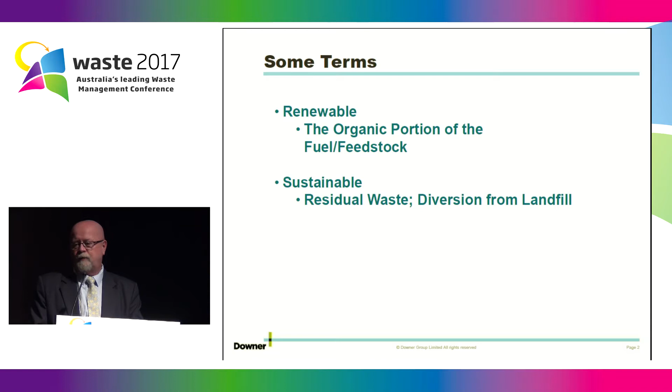So, the trick in looking at a waste-to-energy solution is to understand how much waste you can commit, and that goes back to a number of things. It's not just what my tonnage is in MSW, et cetera, but everybody will move forward and say, oh, well, we could handle all the excess tomatoes, I'm sorry, that would be tomatoes here, with this technology. And yes, if you had enough tomatoes, it would work fine.

The problem is you need to understand how much waste you have, and if you start divvying up every bit of the waste stream into a particular technology, you end up at a point where you have not enough waste stream to supply any technology. So understand what you can do, how much waste you have, and what your streams are.

And that sort of leads into what is the makeup of that waste, understanding the waste, the calorific value, MSW, are you turning it into RDF, are you just supplying MSW, etc., because that will dictate the technologies if we're talking thermal.

You also want to understand if you're looking at anaerobic digestion, for instance, or MBTs, et cetera, how clean the waste stream is, because a lot of people are looking at FOGO as another bin, for instance, and you would think naturally that anaerobic digestion is the way to go, but how clean is that stream? Is there contamination? Will the wheels fall off the technology you pick if you decide to go down that path?

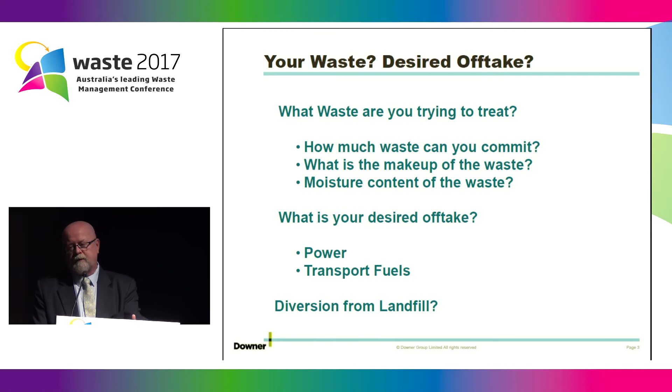And I guess the other thing is, how important is diversion from landfill? We talk about the organic side and the carbon footprint, but if you're looking at the non-organics, that's the diversion from landfill. Some of the technologies create ash; there's about 30% ash created from each of the technologies. Some create less. So understand what the diversion goals are. If you're trying to maximize diversion from landfill, one technology is going to give you a better result than another.

So I've got a bit ahead of myself. The waste-to-energy technologies are broken into two things, the non-thermal and the thermal. The non-thermal is mechanical biological treatment and anaerobic digestion. So again, understanding the waste streams allows you to pick which one you want to go with. In thermal, we have incineration, pyrolysis, gasification, and plasma gasification. Not going to get into the debates about who's been here the longest, et cetera, but those are the main players.

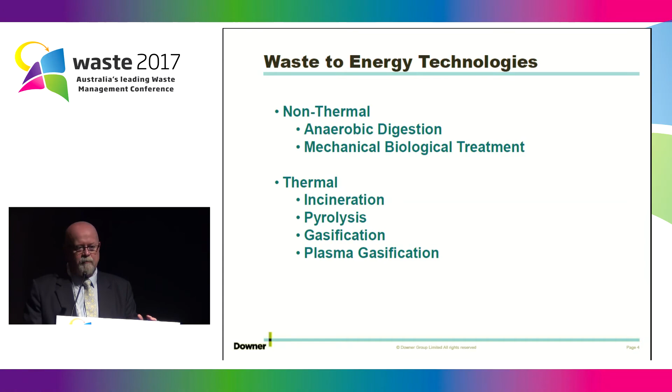Anaerobic digestion, as I said, is great for domestic sewage and organic waste, not great for unsorted MSW. The contamination will stop the system cold, unless, of course, you spend more money at the front end and take the contaminated items out, and then what do you do with them? The residue you get is a stabilized organic matter that can be used for soil amendment after dewatering, etc. Again, that's understanding what you're trying to achieve at the end of the day.

And anaerobic digestion isn't getting rid of waste so much as reducing the quantity, at the end of the day. And methane gas is generated and can be used for energy generation, or you can just flare it.

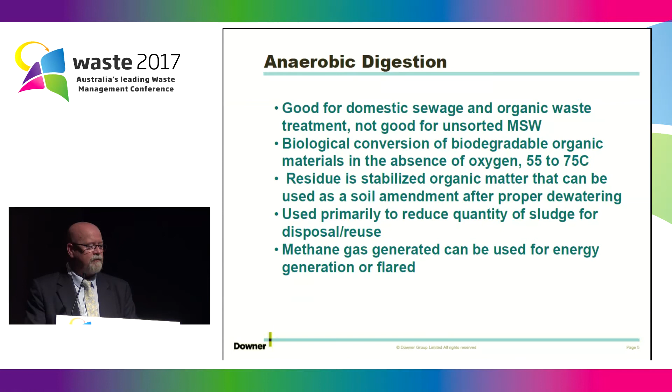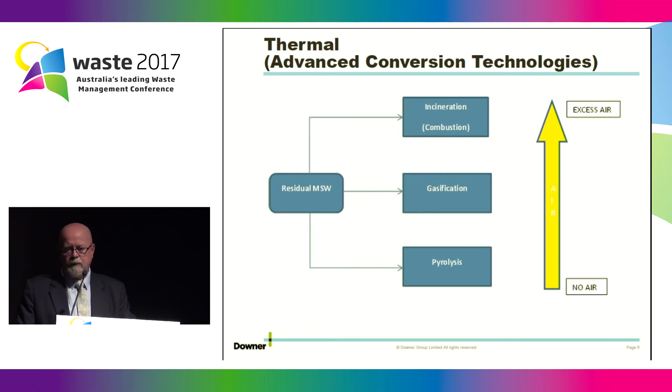When you're looking at the thermal or advanced conversion technology, the definition of the types of technology is really based on the amount of air used in the system. Incineration uses the most air; it's a combustion technology. Gasification falls in the middle compared to pyrolysis, which uses the least. I didn't put plasma gasification on there because the operation of that technology allows you to use oxygen or air, depending on how much electricity you're trying to generate, if it's electricity you're trying to generate.

So as I said, incineration: oxygen required to fully oxidize the fuel. It's combustion. I'm talking raw MSW here. I know there's C&I and many other types of fuels you can use, but I had to choose one, so I chose MSW. The waste is converted to carbon dioxide and water. In that temperature range, there are concerns for dioxins and furans. They have ways of controlling that, but it always has been a concern.

Again, about 30% of whatever you start with is left as bottom ash. Typically it goes to the tip, although the incinerator people will say there are ways of using it in creating bricks or concrete, et cetera. I had one customer who said, oh, I think I'm going to go in that direction. Then he realized he had to start a 24/7 concrete manufacturing system, and he wasn't willing to deviate from his line of business to do so.

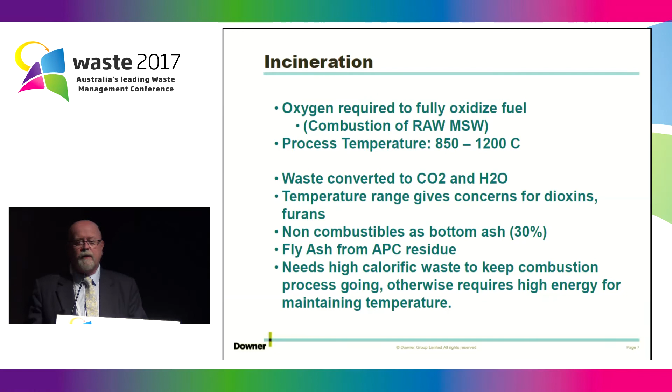The fly ash from the air pollution controls is an issue, often considered to be contaminated, but you can take care of that as long as you know you have it. And it needs a high calorific waste to keep the combustion process going. The actual waste itself is what's burning, so it's like a wood stove. You've got to keep putting wood in or you lose that combustion.

Gasification sits between pyrolysis and incineration from an oxygen point of view. It involves partial oxidization. It does require some heat to get things initialized, and then it sustains itself while it's going. The oxygen is added in small amounts for oxidization to occur. It's not full combustion like an incinerator. Temperatures are above 650 degrees Celsius.

It does produce a syngas, so that gives you more flexibility. You can use that syngas to move forward to transport fuels, for instance, if it's not just electricity. The production of syngas versus just heat also gives you more efficient ways of producing electricity, because the syngas can actually run the generator as opposed to just being combusted for heat.

And the non-organic materials with gasification do become ash. So you still have about 30% of what you started with as ash, and that has to be tipped again. Or again, as I said, somebody will say we can do this; the incinerator and pyrolysis or gasification people can explain what their solutions are for that.

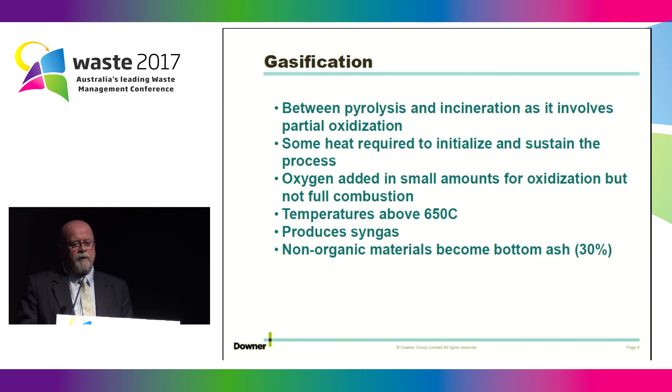Pyrolysis is a thermal degradation of the organic materials, and it's an external heat source, so you always have to be powering it, so it's not as efficient as some of the others. Again, the feedstock has to be fairly consistent. You see temperatures of 300 to 800 degrees Celsius. They maintain that for several seconds, and the downfall that we've seen with pyrolysis has been that of the batch process only.

Now, I'm hearing that there are people starting to look at running pyrolysis units in a non-batch mode. Now, you may ask what's wrong with batch versus running it continuously. Depends on your output. If you're looking at creating power, you can't just turn it on and off. If it's base load power, you need to run this thing 24/7. And there's a lot of issues with turning these things on and off.

You don't just turn it on, get rid of some waste, turn it off, go home, come back and just turn it on. There's warming up periods, there's cooling down periods, etc. So it's batch, but it's not an on-off process. It takes time to do things. You get a char, an oil, and you get a syngas. So again, the syngas does allow you to do some other things. It's not just electricity. If you're looking at fuels, etc., you can go down that route.

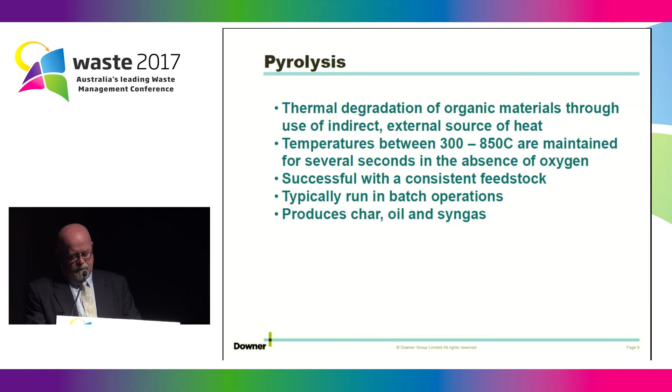2 minutes. Geez, I can't believe all the people here. My mom was going to come over from Canada so somebody would be in the audience. But it snowed.

Plasma gasification. Electricity passes through graphite and carbon electrodes. Plasma is supposed to be the fourth state of matter. And temperatures are over 3,000 degrees; down the vessel, probably 1,600. But you get rid of that issue about furans and dioxins because the temperature is so high.

All the organic materials are converted to a syngas. That syngas, again, is good enough to actually run a recip engine, or you can use it for combined, higher efficiency electricity generation, or you can do your transport fuels.

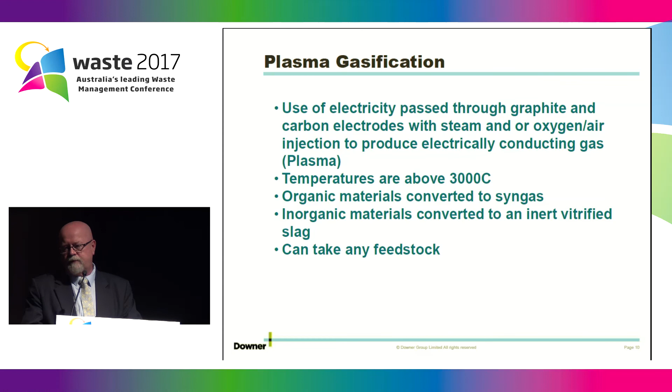The inorganic materials are converted to an inert vitrified slag. It's a glass-like substance that can be used for road base, etc. It's inert, so you don't have to worry about that coming back to bite you on the butt, so to speak. And it can take any feedstock. You don't have to have refuse-derived fuel, etc. You can just put straight MSW, etc.

Sources of revenues, just something to think about. Your tip fees, your electricity. I say electricity, it's any PPA, whether it's ethanol or whatever. The heat, maybe in Canada we think about heating, not so much here. Environmental attributes, you know, the EPAs, etc. There's some funding to be gained there. There's also the levy that you don't have to worry about once you stop tipping things. The aggregate can be used for road fillers, etc.

Now I'm under pressure. And you've got, in MSW, usually 15 to 25 kilograms of metal per ton of waste, so you can recycle that. The water that's recovered is potable water, so that's recycling also.